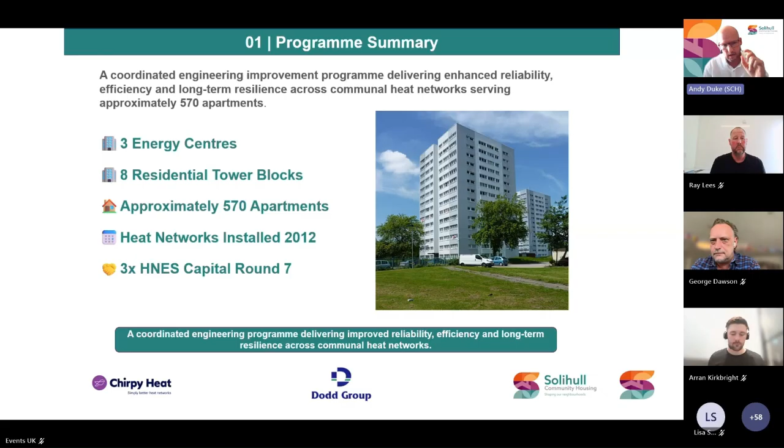Similar themes to colleagues that have presented previously. Historic legacy systems were installed around 2012 by British Gas, so we're starting to see failings in the system and have done for some time. We've seen a growing trend in reactive maintenance, which has asked questions of the system's capabilities. However, the biggest reason for doing this work was what our customers were saying to us. They're saying the systems were unstable, they were expensive, they were switching to electric heaters rather than using the biomass system, and also we had lots of outages that only increased. This was about 5 or 6 years ago. So we started seeing these trends, and this is what's led us to investigate what exactly is going on, and with our principal contractor Dodds, this is what we've been doing.

As colleagues have said previously, the BMS - the analogy of on or off is extremely accurate. That's basically how they were initially operating, either full bore or off. So clearly we wanted more control over our systems, and we also suffered with carbon steel corrosion from when they were first installed, and sweating of the pipework. So this was all adding up in terms of capital outlay. When we looked at the extent of what this could potentially cost us, we had to look at options of funding, and thankfully HNES were there to assist.

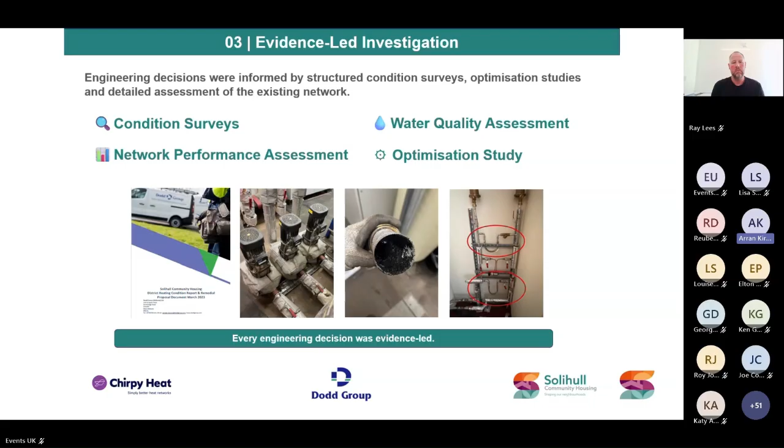Following this, we looked to develop a clear plan which used the findings of these investigations to inform the measures that needed to be undertaken. This focused on improving performance across the network, essentially increasing efficiency, lowering customer costs, and improving the maintainability of the network to ensure any future issues could be easily addressed or avoided, with minimal downtime and minimising replacement costs as well. These aspects combined looked to maximise the impact of the funding we were applying to HNES to use.

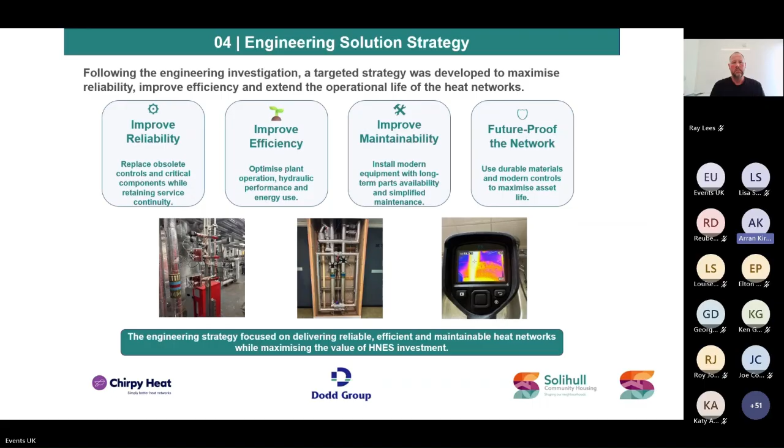Have we lost you, Arran? Oh, sorry. Where did I cut out? I think if you just start from this slide again, that'd be great. Apologies, my internet seems to be struggling today.

So in terms of the engineering scope, the improvement plans looked at the networks holistically, ensuring that measures weren't taken in isolation and that all aspects of the heat networks would operate efficiently, sort of in unison. So within dwellings, this looked at undertaking measures to increase efficiency, provide additional control, extend the system lifespan, and provide even heat distribution as well.

Then for the distribution network, measures looked to replace leaking and degraded pipework, increase maintainability, reduce heat loss, and then again extend system lifespan, which was a key one for us. And then finally, for the energy centre, the works looked to increase control over the system, maximise the plant efficiency, and increase the water quality as well, which again obviously helps with the lifespan. So by bringing all of these elements together, the result was a high-performing, efficient, and reliable heat network. Next slide, please.

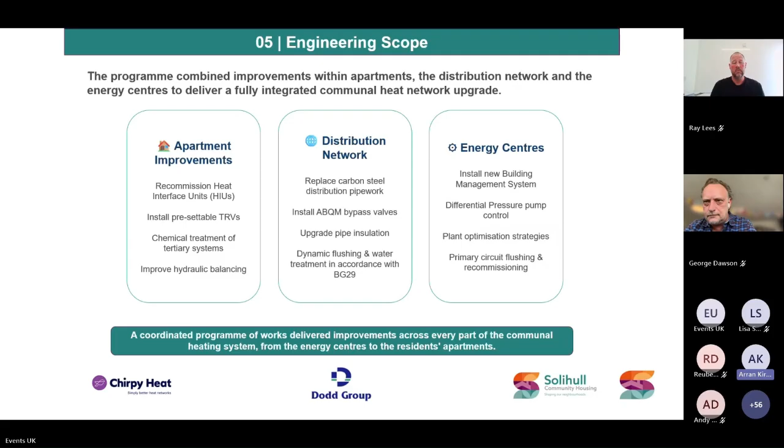So one of the primary reasons for the success of this project was the collaboration by all parties involved. So Solihull Community Housing is the heat network owner and operator, and they were the project sponsor and responsible for bringing in the other parties to the project as well. Then Chirpy Heat were brought in as a specialist in undertaking some of the early investigations and optimization study, and then pulling together the HNES application as well.

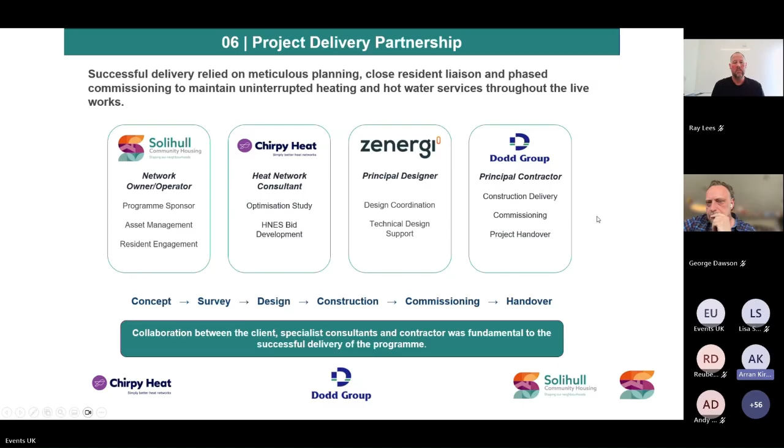Zenergi came in pre-application to verify the design, and then finally Dodd Group were responsible for the overall project delivery, including the installation, the commissioning, and ultimately delivery of the efficiency improvement measures. Next slide, please.

So in terms of the process, that would usually begin with Chirpy submitting a free of charge HNES revenue application for the client, and then assuming that application is successful, we then go on to deliver an optimization study. However, on this project, due to time constraints, we went straight into the optimization study without HNES funding, so it was self-funded, and that meant we could go directly for a HNES capital application, which Chirpy Heat took a lead on in collaboration with Dodd Group.

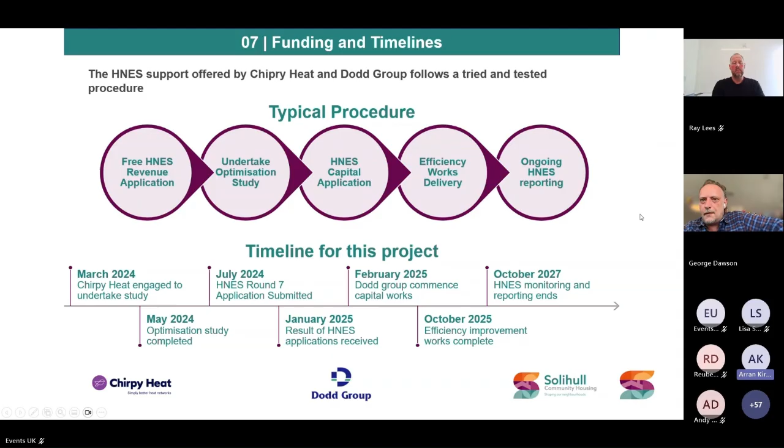Once the application was confirmed in terms of receiving the funding, Dodd Group were then able to crack on with delivering the works themselves, and then passed back to us for some ongoing HNES monitoring and reporting. So as you can see from the timeline on the bottom, it was about a year and a half from starting that optimization study through to the works actually being delivered, which was fairly efficient in terms of timing. So I'll now pass over to George, who will go through the works delivery and some of their impacts as well. Good stuff. Thank you, Arran.

Apologies if there's any background noise. I'm in quite a busy hotel lobby.

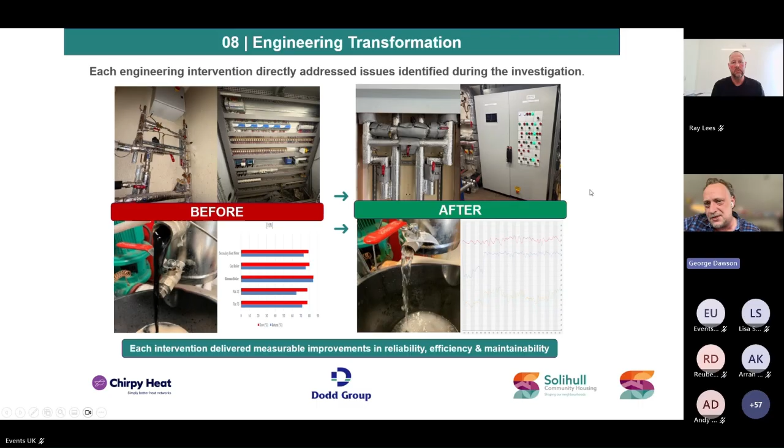So as Arran mentioned, we engaged Zenergi for a full design assessment of the existing installation to verify pipework sizing, flow rates, etc., to ensure efficiency and also to safeguard all of the distribution circuits for potential future low temperature use through alternate fuel sources. Incidentally, these are predominantly biomass fired energy centres.

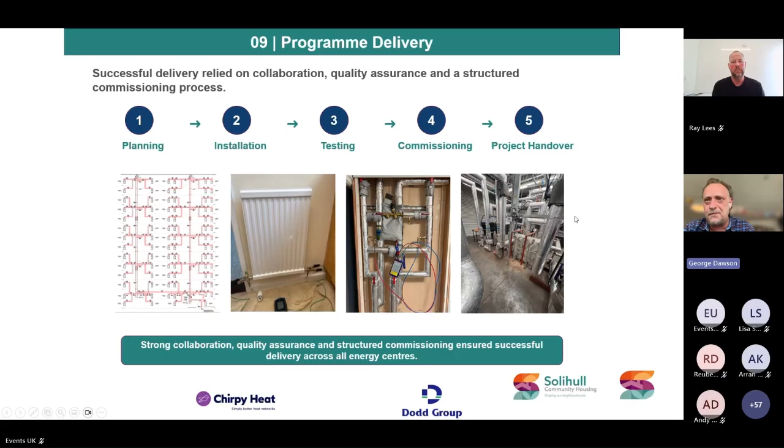So I think, as Andy mentioned, there was quite a high tariff at the outset for the residents for the use of the heat service, which thankfully post measure installation has reduced significantly, along with the efficiency gains that we've proven to reduce the operating costs for Solihull. Next slide, please.

So really, the way we looked at it, as Arran mentioned, probably predates the HNES application by a couple of years. It was quite an intensive investigation of all of the 23 biomass-fired heat networks within the Solihull borough, looking at how we could improve the efficiency, how we could reduce the outages within all of those blocks. Carbon steel being a major issue for us, which hadn't been treated correctly at the outset, wasn't lagged correctly with no vapor membrane, so it was basically rotting from the inside out and the outside in, which is perhaps the worst situation you could find.

Basically, through the installation process, Solihull now have systems with a 25-year manufacturer warranty on the installed pipework, ongoing water quality regime as per BSRIA requirements. So we're maintaining the performance, the efficiency of the systems on a constant basis. We've got remote connectivity, as I mentioned, through to the BMS. So if there is any issue or any alarm scenario, that's signaled to us via email from the respective energy centres. Although that said, we've had no unplanned outages since completion of the measures.

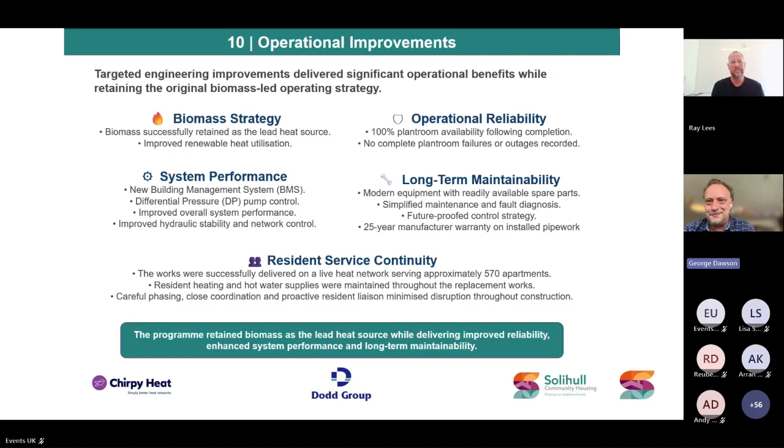So it's still relatively early days in terms of the ongoing assessment of efficiency improvements. As I'm sure the other colleagues that have presented today can attest, it's basically a process of tweaking the BMS to understand what setback temperatures we can achieve where full service is still maintained, but at a reduced cost of delivery. It's basically targeting supply to demand as best we can on a heat interface network. But we're already seeing significant efficiency improvements and further reductions to resident energy tariffs. Next slide, please.

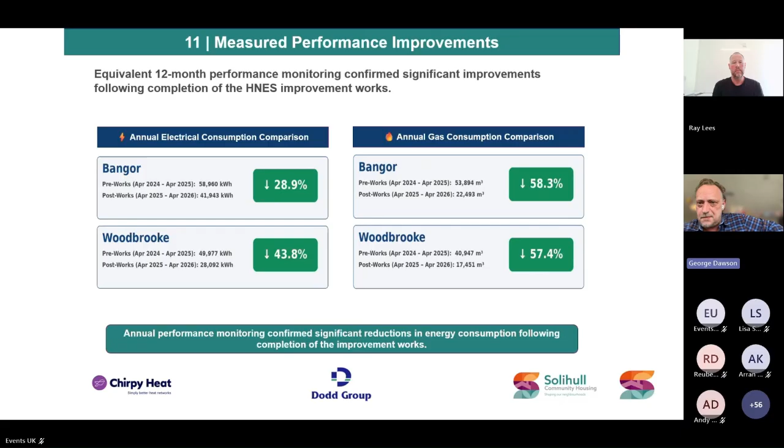So really, just to reiterate, it was a very sizable project. So 8 high-rise blocks delivered over a 10-month period with some quite challenging funding expenditure constraints. At the outset, we were awarded in January 25, and at least 4 of those blocks had to be completed before the end of that financial year, so by the end of March. So we had to mobilise very quickly and progress through the programme with speed. But that said, we had some fantastic results and great resident accolades from the work that was completed.

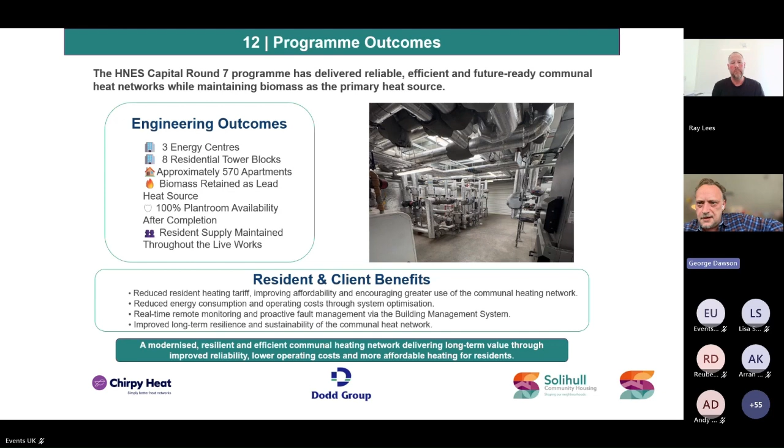That's kind of it for me, I think. But equally, as everybody said, oh no, there is some more. Sorry. Right.

Yeah. So obviously, we're still engaged with Chirpy for the ongoing monitoring and reporting back into HNES. We are in the first year of a 10-year partnership for the day-to-day repairs and maintenance with Solihull Community Housing. So we continue to operate and maintain the blocks in question, and are looking to submit in the next round for the remaining 5 blocks on the heat networks.